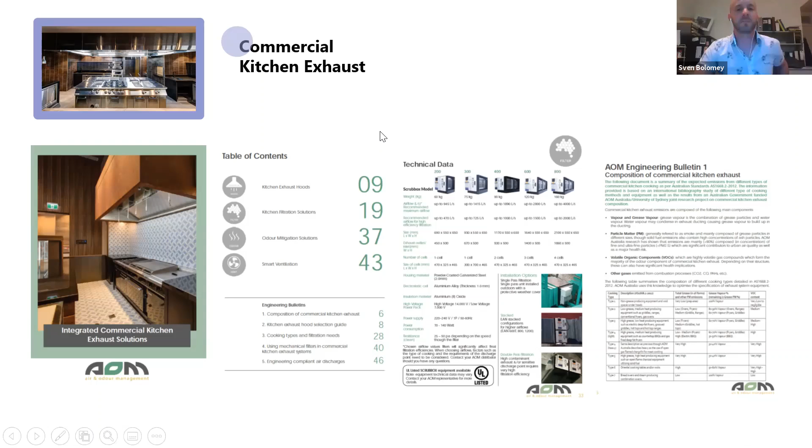So, commercial kitchen exhaust, first slide. During the course of the presentation, I'll be looking at risks, and then how to mitigate those risks through the exhaust system. I'll always come back to this slide to identify the different components of the commercial kitchen exhaust system.

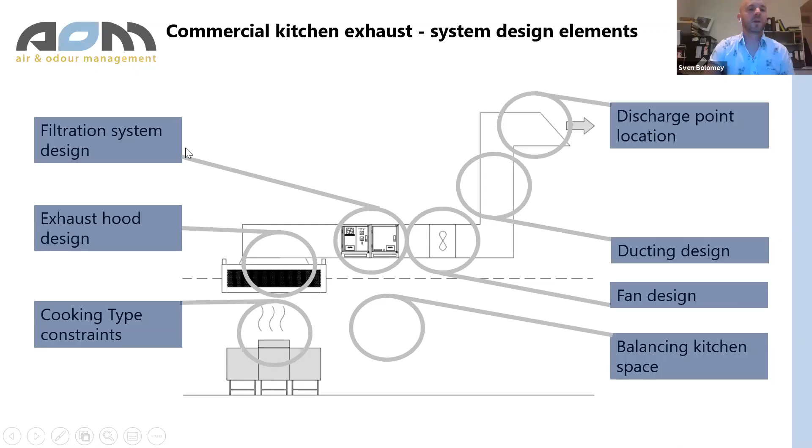So basically, in no particular order, we can look at - and we'll come back to these - cooking type constraints, the type of cooking, the design of an exhaust hood, filtration systems, fan ducting design, the location of discharge points, and the balancing of the kitchen exhaust or the kitchen space, the air balancing. I'll be coming back to this slide and looking at each of these with a focus on the risks.

First couple of slides is commercial kitchen exhaust. So what is commercial kitchen exhaust? We had been working in this space for quite a while, and about 5 years ago we realized we were doing a lot of work with filtration systems and hood design, but we ended up figuring out that not that many people, even internationally, had really looked into what commercial kitchen exhaust was, or studied its composition. So we set up a research project with the University of Sydney.

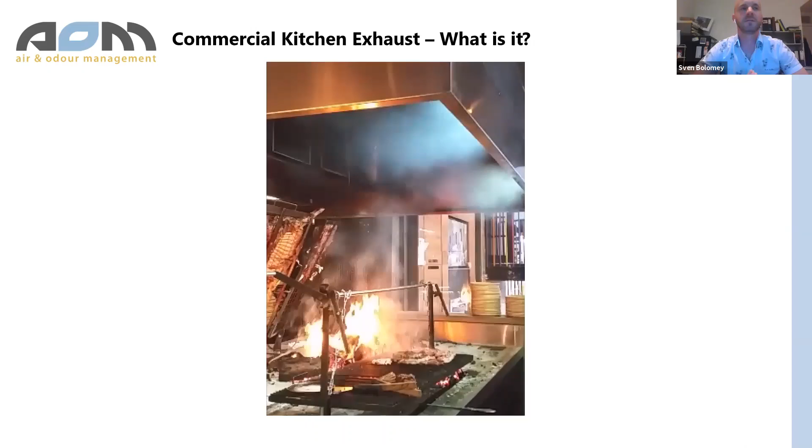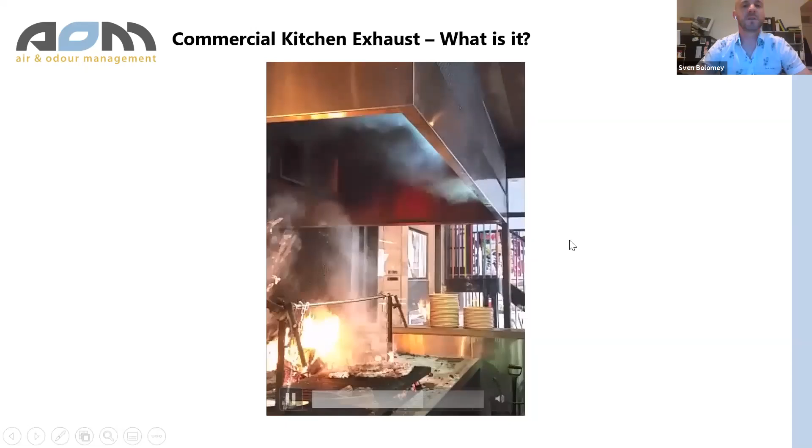This was quite a few years ago now. That research project had the objective of looking at what was actually in commercial kitchen exhaust, and then analysing the different types of filtration equipment generally available on the market to filter out and treat commercial kitchen exhaust, looking at efficiencies and so on. That was the objective of that research project, which we ran for 6 months with the university. It also resulted in quite an in-depth bibliography study from international literature, which we compiled together. A lot of what I say today comes from this research project.

So what is it? Ultimately, what you're seeing here is a pretty extreme example because it's an open fire pit - you don't find those in every second restaurant. It's grilling huge amounts of meat, an Argentinian grill type restaurant. So there's a lot going on under this hood.

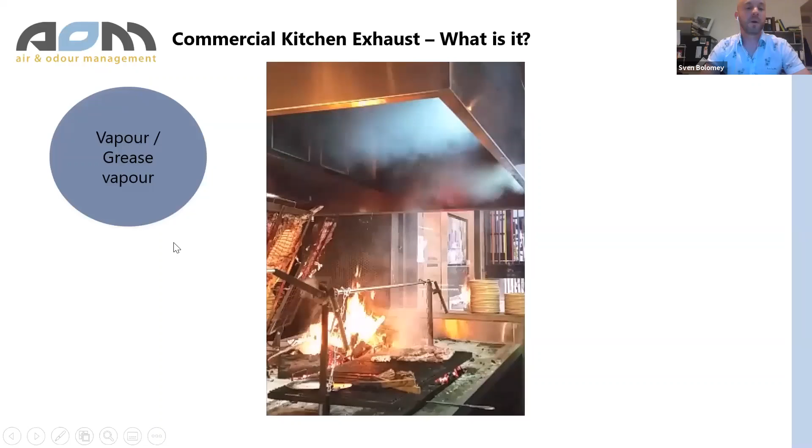In a lot of cases, what you find is the main composition of commercial kitchen exhaust is just a whole load of vapor, because you're heating stuff up - it's water going up into the hood system. But in addition to that vapor, there's a whole lot of grease molecules attaching themselves to the vapor molecules, creating what we've called grease vapor. And the interesting thing about grease vapor is that it has a tendency to condensate when there's a temperature difference, particularly in the ducting. It's generally with this component that you find the buildup of grease in the ducting, because this grease vapor condenses there.

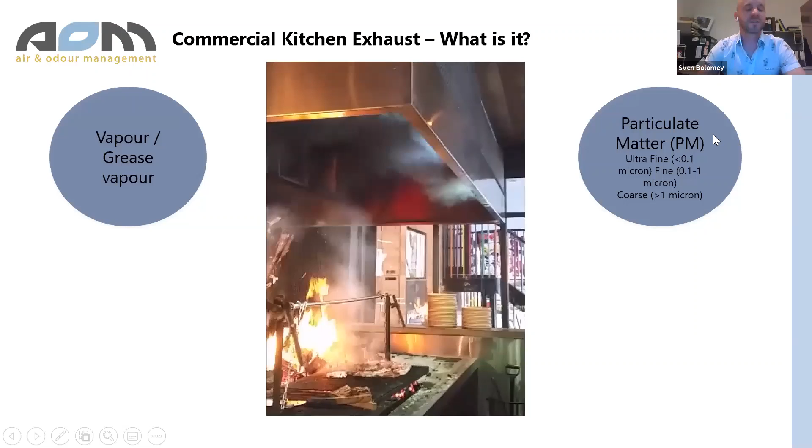The second main component is particles - a huge amount of particles, different forms and sizes. A lot of this particle matter is commonly referred to as smoke, because it's what you can see. In the footage here you have embers coming up, which are large particles, then a whole load of smaller particles because there's a lot of ash also going up. But what we found is that particle matter on a standard cooking line is a whole load of grease in different forms, particularly very fine particle matter - it's just grease forming particles and getting sucked up into the exhaust system.

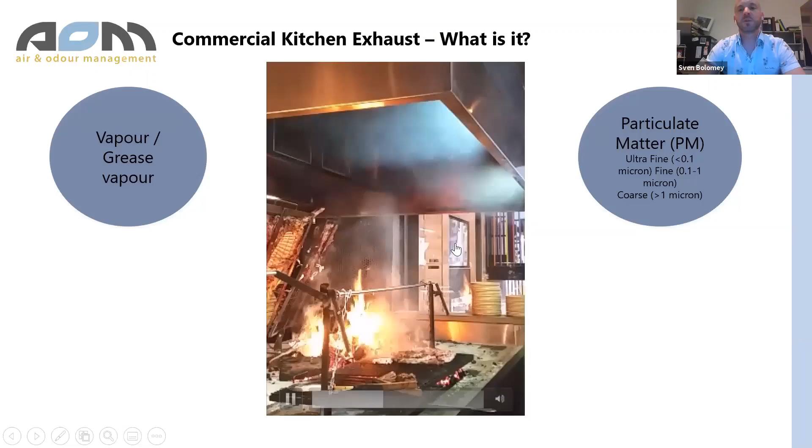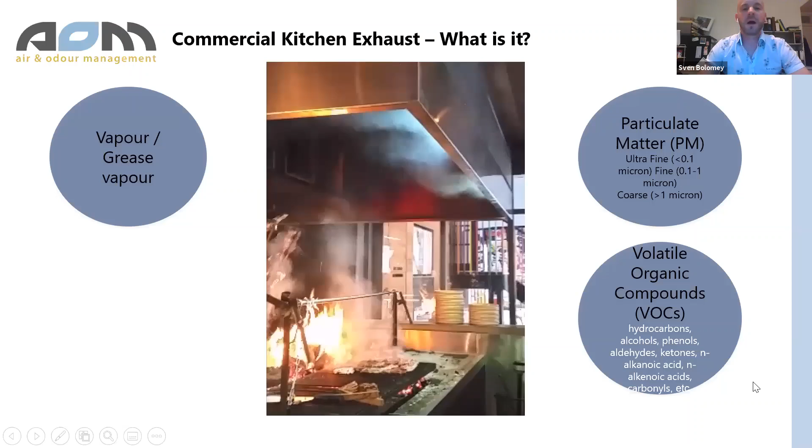Once we've taken out pretty much that solid component, the particles, what's left is a whole load of gases. The main gases, which create the odor component, are composed of volatile organic compounds - a whole bunch of compounds we've been able to identify in kitchen exhaust. Then finally there's a whole bunch of other gases that are really standard gases related to any type of combustion process, so CO2, CO, NO2, and so on.

So when we look at treating commercial kitchen exhaust, we can work on removing grease vapor, we can work on removing particle matter, we can look at acting on or breaking down volatile organic compounds, but we can't do much about these other gases - those are going to have to be discharged at the discharge point.

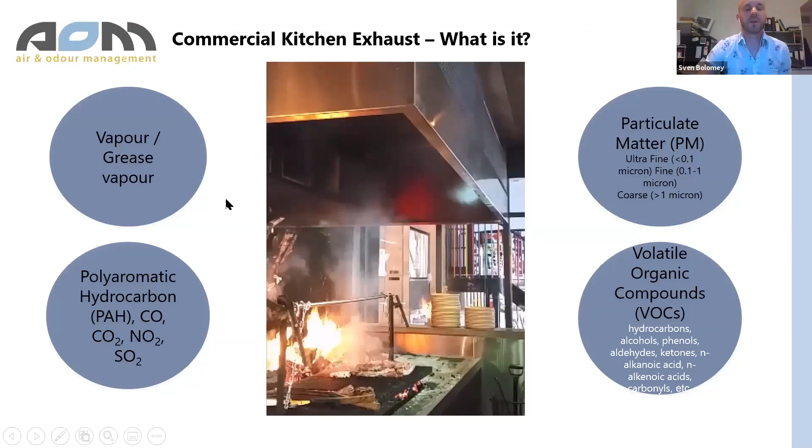So just looking a bit more in detail with regards to particulate matter. During our University of Sydney testing, we got a char grill, an open gas-fired char grill, and we flipped burgers on it. Why we chose that piece of equipment in particular, I'll come back to it later on with a few slides.

It's one of the worst offenders, let's say, in regards to creation of contaminants in kitchen exhaust. So a gas char grill, you'll have the grease of burgers dripping into the open flames and really igniting and creating a whole load of particles and particulate matter. So for us, it was one of the worst offenders, and we knew that prior to doing this research, and this research confirmed it.

What we found in particular is that this type of appliance, like I said previously, produces a lot of small or fine particles. So it's really small stuff that's getting sucked up into the ducting, and it's not the type of stuff that gets then easily deposited into the ducting or drops into the ducting.

This is the type of stuff that you see as smoke that comes out of a stack. So that's one particular first thing that we found, is there's a very high concentration of the fine particles as opposed to these larger coarse particles, which are generally stopped by a standard grease filter, a baffle or stainless or honeycomb filter within an exhaust hood. But this stuff just goes straight through.

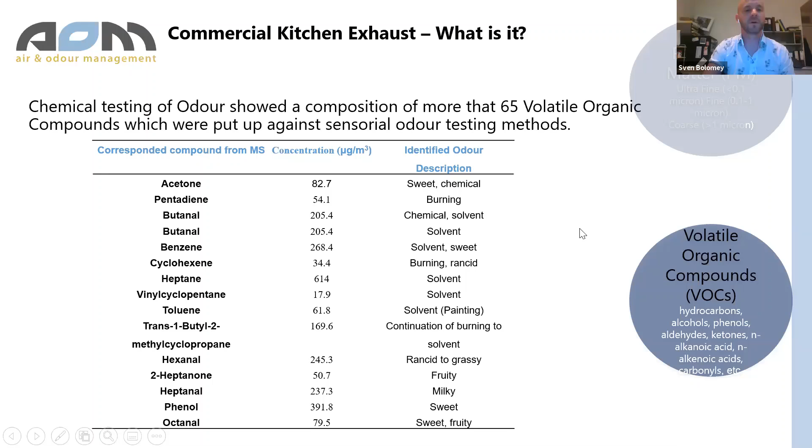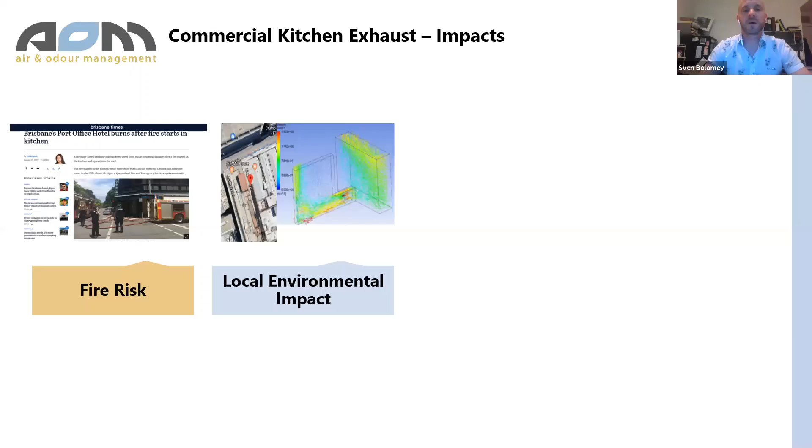With that in mind, I'll be looking in particular at four different impacts generally related to commercial kitchen exhaust systems, things that often come up in projects we work on. The first is the fire risk of exhaust systems. The second is what I've called a local environmental impact, the impact to local neighbors or who live near a discharge point, users, offices, and so on. Then there's an indoor air quality health impact related to all those contaminants in a kitchen exhaust. And then I'll briefly touch on a general urban environmental impact on a larger scale.

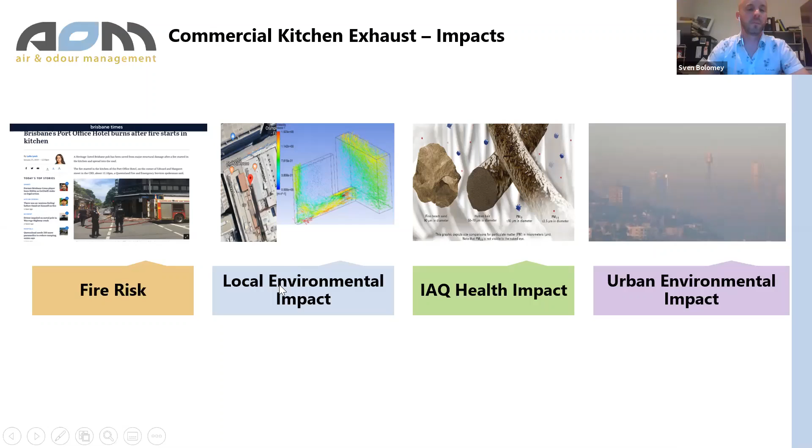So moving higher up from this local environmental impact, looking at these different impacts one by one. The first one, the fire risk—very common. What we've found is it's common in small shops that are not necessarily abiding to standards, but it's also in heritage buildings with large, very respectful, let's say, kitchens.

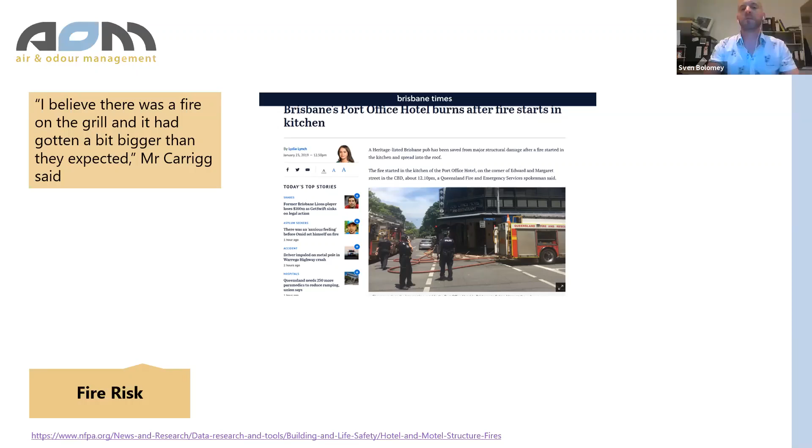Typically, the example that I've put up here is the Brisbane Port Office Hotel, a couple of years ago. That fire was contained within the ducting, luckily, and didn't move out of the ducting into the whole building. The interesting part about this example is that the fire started on a char grill. So it's not necessarily a solid fuel appliance with an open fire pit like we saw in the video previously, but here it was really just on a standard gas-fired char grill with a flame that moved up and ignited fuel in the ducting.

The US National Fire Protection Association have stated and do state that one of the leading origins of structural fires in hotels and motels is coming from the kitchens. So just to underline that it is a hot topic, pardon the pun.

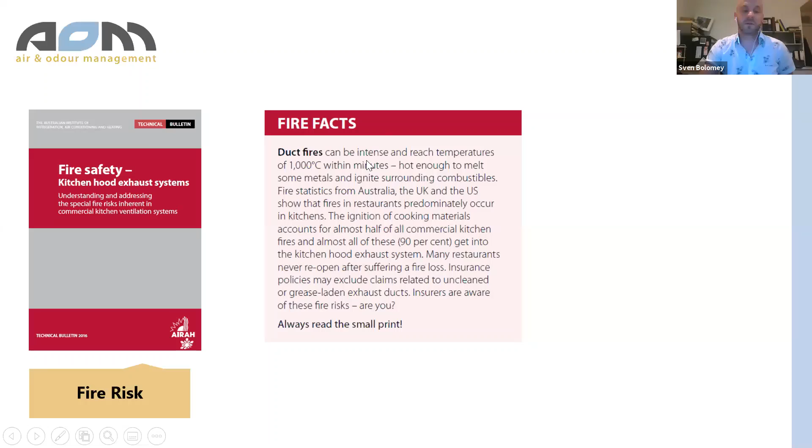The key document with regards to this, and I won't be repeating everything from this document because it's quite comprehensive, is the AIRAH Bulletin on Fire Safety of Kitchen Exhaust Hood Systems. So that's a good piece of reading if you want to delve into that. One thing that the document does repeat as well is that it's a serious thematic, and it does give a brief overview as to why kitchen exhaust systems are such a high fire risk.

Very simply put, it's this fire triangle, which is very standard, but basically you have cooking. So you have the ignition, you have the flame that's able to ignite the fire. You have the buildup of fuel in the ducting, or in some cases within the appliances, such as fryers, which have oil just sitting there at high temperatures.

So there's fuel, there's ignition, and because it's an exhaust system or a ventilation system, you have a whole load of oxygen. So all these three elements to the fire triangle are perfectly represented within a kitchen exhaust system, and that's why there's such a high risk.

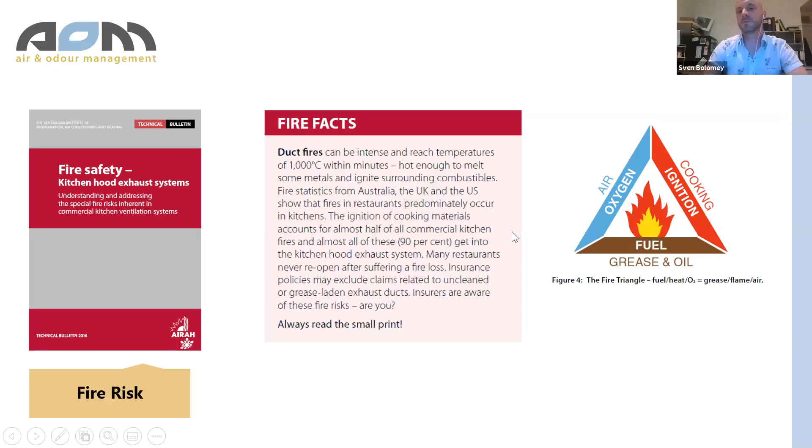So coming back to this slide and looking at the different elements as to what we can do to minimize this risk with these different design elements, there's three in particular that I'll look at. The first thing is identifying the cooking type and the constraints that the cooking type might result in. As a barrier between the ignition from the cooking equipment and the buildup of fuel in the ducting, you have the exhaust hood. So it's clear that the exhaust hood, which acts as that barrier, has an important role to play, and then general ducting design as well, because that influences the capacity of the system to build up fuel.

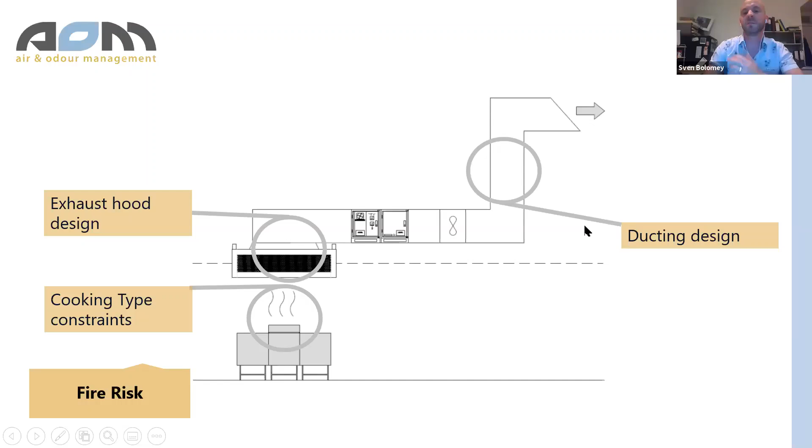So looking at cooking type constraints, research identifies three primary types of equipment that are likely to cause restaurant fires. The first is the deep fat fryer, again, because it has that huge amount of oil just sitting there at a high temperature, and it's very much flammable cooking oil. And as I said in the first slide, it's also the appliance that generates grease vapor, and that grease vapor builds up in the ducting. So you have that source of ignition and the buildup of fuel in the ducting through this appliance.

Then really anything to do with gas, because you have that open flame - be it a char grill or even gas cooking ranges, which causes flare up. And also generally these appliances are used with very fatty type foods, examples of steaks and burgers, and fatty type foods means more buildup of fuel in the ducting.

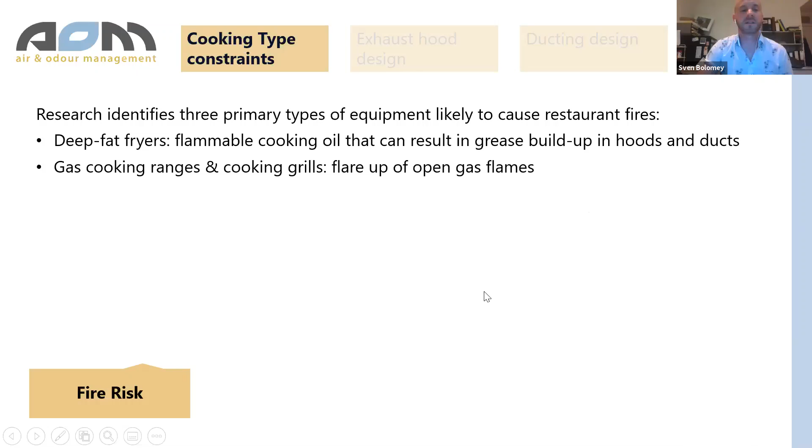And then you have, of course - and this is a lot of cases that come up with restaurant fires - that come from solid fuel. And the more there's solid fuel in restaurants, the more the risk of this fire comes up.

So AS 1668.2 has a clear statement with regards to solid fuel and the constraints around solid fuel. That statement is that any charcoal and solid fuel appliances should or need to have a completely separate exhaust system, so there's no mixing of solid fuel and non-solid fuel appliances within the one exhaust system, as per that standard. The reason is: solid fuel has a higher risk of ignition, and the non-solid fuel appliances, which are generally deep fat fryers and the likes, will build up fuel. Solid fuel generally runs at such a high temperature that it burns off a lot of fuel, whilst the non-solid fuel appliances build up the fuel in the ducting. So when you blend the two together, you get a higher risk of fire. That's why the Australian standard, that section, pretty much says two separate systems.

So one thing that I have come upon recently when dealing with this is the scope of this standard. One of the first statements right at the beginning says this standard is applied to new designs and new builds. So you have a lot of situations where, of course, it's retrofitting new restaurants into old designs and old builds, where it's impossible to have two different exhaust systems because it hasn't been designed that way. So that's when this clause can be bypassed, using systems to minimize the risk of fire.

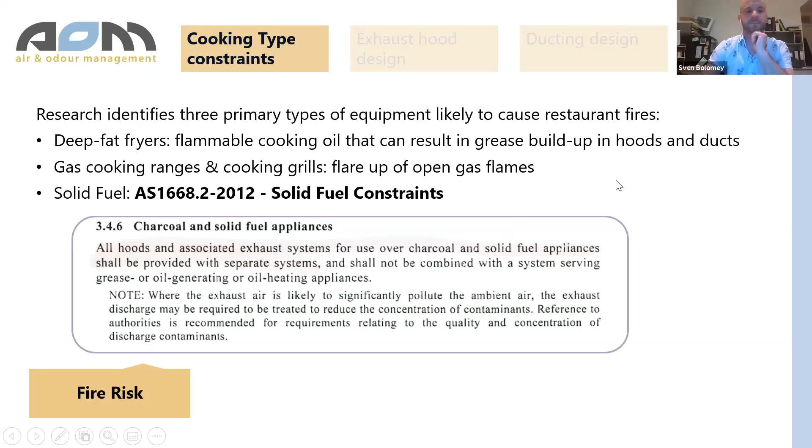So as I said previously, exhaust hood design comes down to AS 1668.1 2015, where we're looking at the exhaust hood as the barrier between a potential ignition and the build-up of fuel in the hood. Australian AS 1668.1 states, and the key statement is here with regards to flame and spark arrestance: when you have an exhaust duct in a building with more than 10 meters of length and an exposed flame or embers - embers is clearly when you're using solid fuel, exposed flame would refer to gas type appliances as well as solid fuel.

Here the statement says that devices that prevent the spread of flames in accordance with UL 1046 are incorporated into the exhaust hood or filtration systems. So UL 1046 - looking through it, there's a couple of elements. One, it wants any grease filter within the exhaust hood to act as a flame barrier, meaning effectively stopping a flame from moving up through the hood into the plenum, into the ducting. So testing has shown that baffle filters in that regard respect that flame barrier. Honeycomb filters - I have not seen a honeycomb filter that has successfully passed that test.

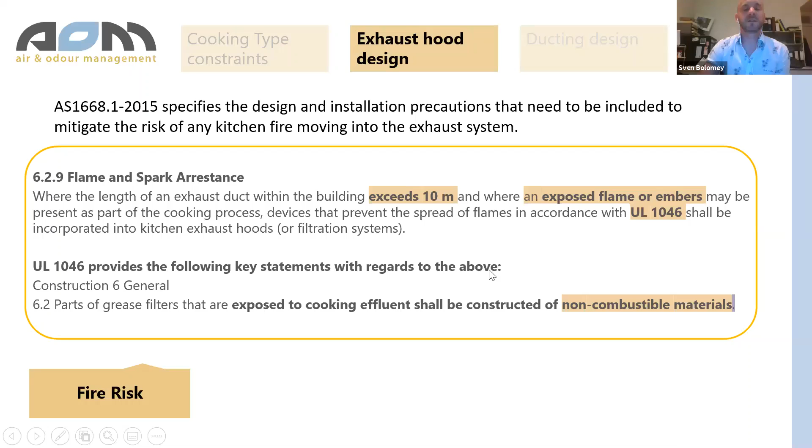So looking at the exhaust hood, not only as a barrier between flames moving up through the ducting, but also the first or best means of filtering out grease particles prior to them moving into the ducting and accumulating. This is when we did our research with the University of Sydney and tested different forms of filters or filtration equipment that we could effectively position into an exhaust hood.

So what we have here is HCF, a honeycomb filter, so just a standard grease filter located in the exhaust hood; a grease filter with UV built into the hood; a grease filter with electrostatic precipitators located in the hood; double pass electrostatic, so that's two electrostatic precipitators one after each other, also located in the hood; and AC, which is activated carbon.

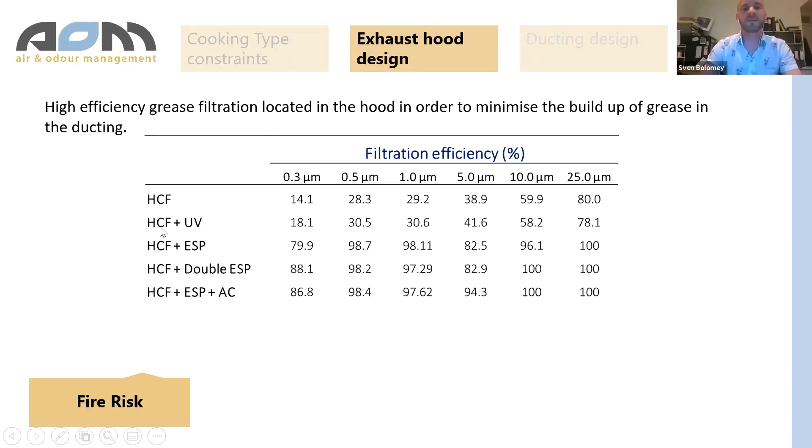So we tested the different efficiencies of these filtration methods, and to no surprise to ourselves, because we'd been using this method the most previously, the double pass electrostatic precipitator was able to achieve the highest efficiencies of particle filtration, removing grease particles within an exhaust hood, with efficiencies into the high 90% of filtration.

Again, this is with flipping burgers over a char grill, producing a lot of contaminants. In these situations, a UV treatment really didn't have a significant effect on the amount of particles that were getting through the exhaust hood.

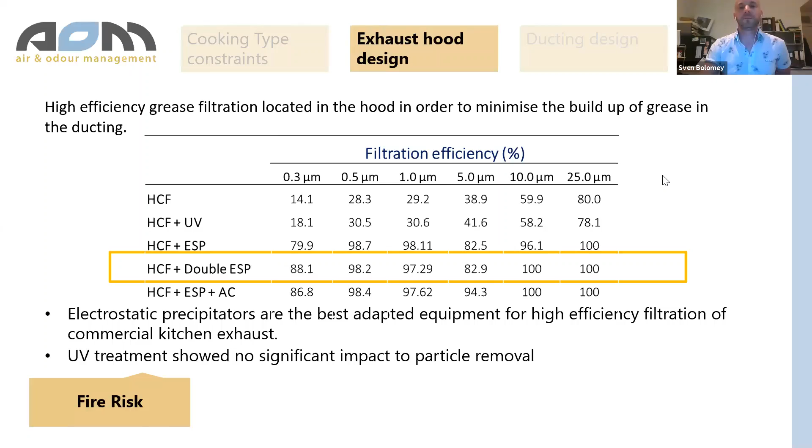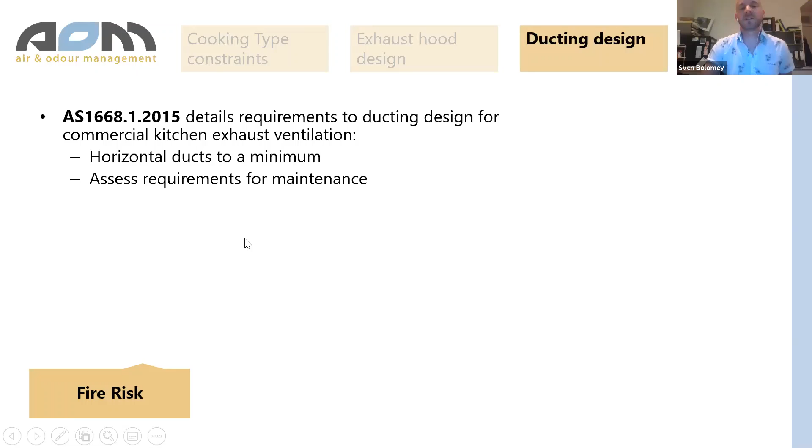Moving on to ducting design, this refers back to AS 1668 and how to minimize or design ducts, or a whole project, so that you minimize the risk of buildup of grease. So the key statements are: horizontal ducts to a minimum, and assess requirements, of course, for maintenance. That's really just summarizing very briefly that standard.

Another interesting piece of bibliography, it's an older document now, dates back from 2002, but it looks into the different ways that particles or grease build up in ducting. It looks at three different grease deposition methods in ducting: gravitational, with particles dropping down due to gravity and building up in the bottom of the duct.

You have turbulent deposition, caused by turbulence with the air in the ducting, with particles being smashed on the sides of the ducts in particular, and then building up within the ducting. And then there's that temperature differential I discussed previously, where you have condensation of grease vapor in particular.

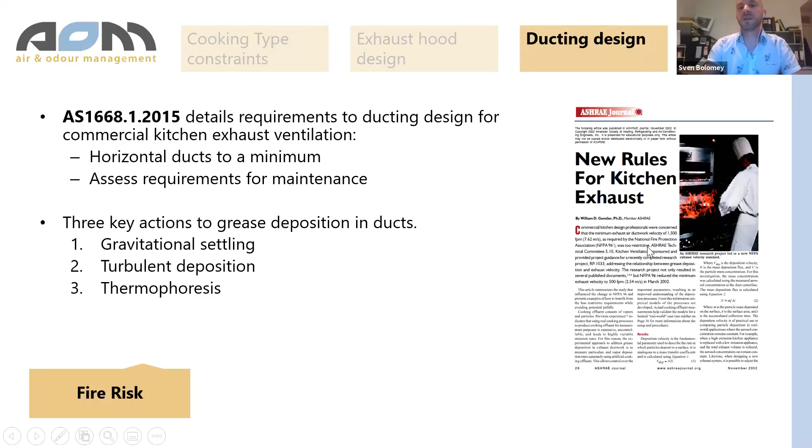So this document looked at these three different methods and in particular looked at velocity through ducting. In Australia, we generally design horizontal ducts to a velocity of about 10 meters per second, a little bit under perhaps. This document looked at what happens if we start varying the velocity and bringing it down - does that significantly increase the amount of particles or grease building up in the ducting? Basically, the answer, in summary, is no.

The results were that in the majority of cases, you could bring the velocity down to roughly 2.5 meters per second and still have the same type of buildup as you would have at 10 meters per second.

The reason being that when the air goes fast, you have less gravitational settling but more turbulence. When it goes slow, you have more gravity, less turbulence. Fast, you have a lot of turbulence, and those kinds of balance out.

That's the majority of cases, because then condensation - if the air is slow and you have big temperature differentials, with ducts going outside in Canada or wherever, then you do have a lot more condensation issues. But in the majority of cases, velocity was not necessarily a reason for increased grease buildup in ducting.

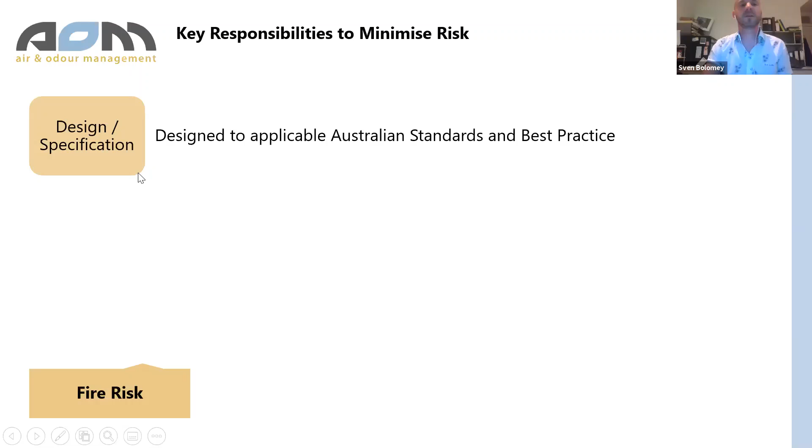The overall system needs to be supplied and installed as per that design. But ultimately, and we see this with fires in buildings, it comes down to the end user and the capacity that the end user has to maintain the exhaust system.

And that's one thing, because I'm in a working group within AIRAH, they've set up a working group with a particular focus on fire risks of exhaust systems and how to ensure through maintenance and proper design, allowing for proper maintenance, that we're able to minimize that fire risk.

This technical group is looking to establish a best practice guide to underline industry best practice as to how to maintain these systems to decrease the risk. But the key element is that it's really the capacity to maintain these systems that's important.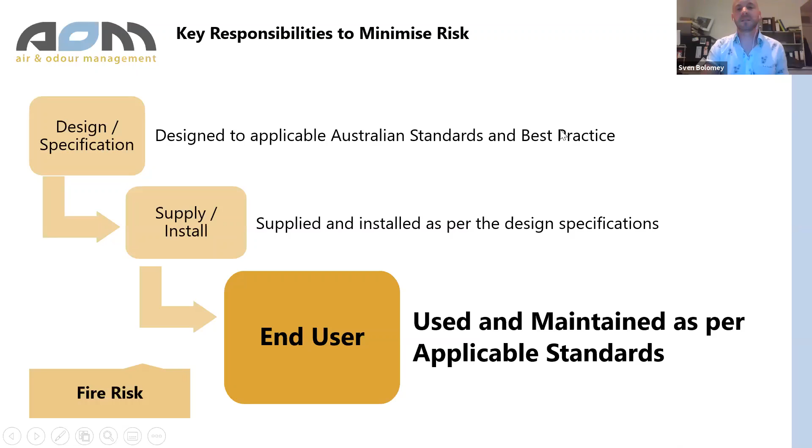So moving on, just a quick example here: the W Hotel up in Brisbane. It was part of a new development at 300 George Street. For the hotel, the overall mechanical design of the exhaust systems was to minimize the buildup of fuel in the ducting.

Some of the restaurants were at lower levels, some were at higher levels, and they just wanted to capture the grease, as much of it as possible, as close as possible to the source, which is the kitchen equipment.

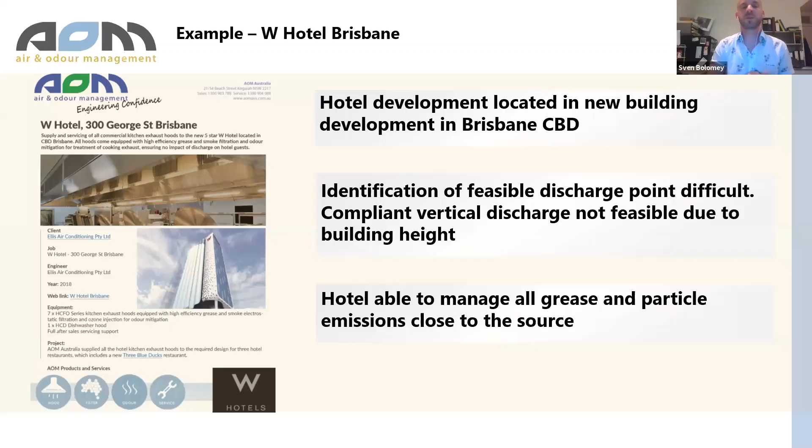So in this case, the exhaust hoods we supplied were the ones detailed previously, with inbuilt electrostatic precipitators able to remove up to 90 to 95% of the grease within the exhaust hood. With proper maintenance of those systems, we're continuously removing the grease out of the exhaust hoods, stopping the buildup of grease in the ducting.

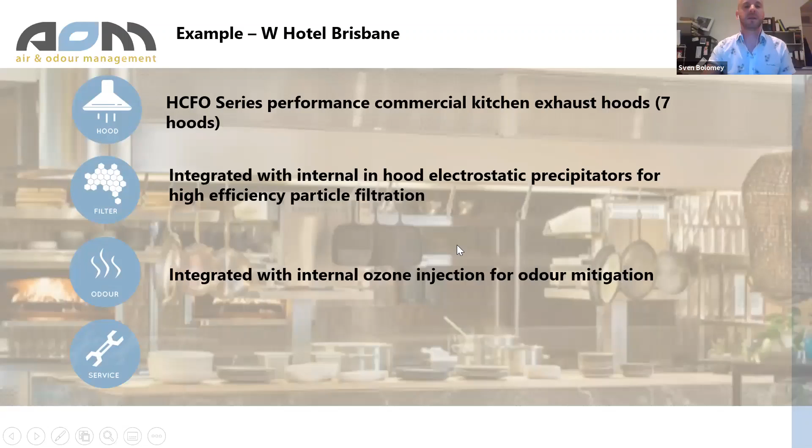So there's also a requirement for servicing, of course, of these exhaust hoods.

So this discharge point was really an example of a very high environmental, or high local impact, discharge point.

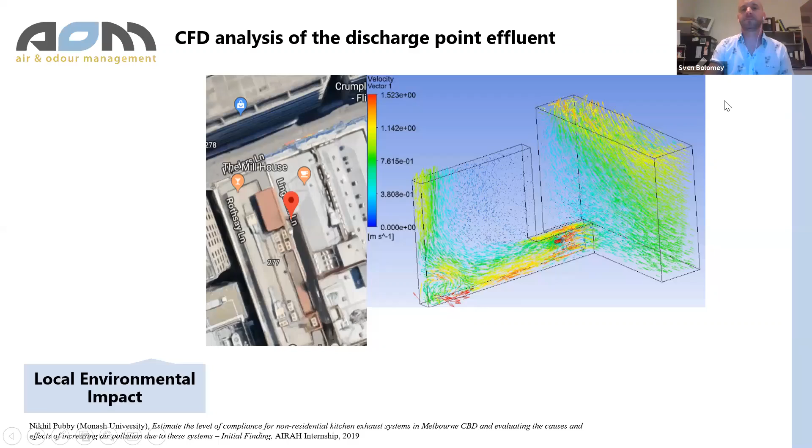AS 1668.2 pretty much defines the requirement for the discharge of commercial kitchen exhaust. It runs throughout the standard, so I've taken out some of the key elements here that we'll discuss in more detail.

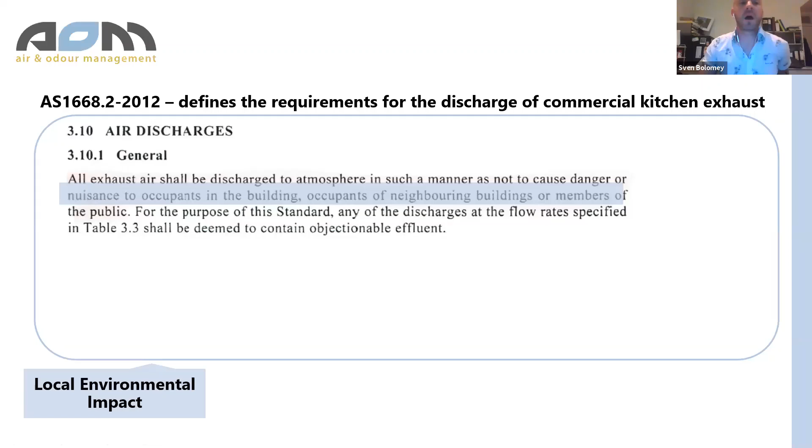The first is the chapter related to air discharges, stating that exhaust air should be discharged to the atmosphere in a manner as not to cause danger or nuisance to occupants of the building, neighbouring buildings, or members of the public. One of the key words here is 'nuisance,' and it comes up quite often within the standards.

A bit further on, in the chapter related to concessions, about whether or not you can discharge horizontally, another key word that comes up often is 'odour.' Odour is pretty much the parameter that exhaust systems are judged upon, the capacity of whether or not they're producing odour.

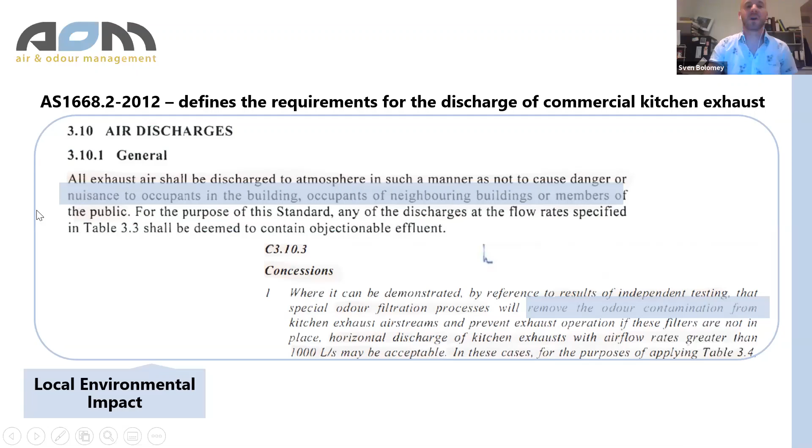So what is the nuisance? A general definition: environmental nuisance is defined as an unreasonable interference with an environmental value caused by emissions of aerosol, fumes, light, noise, odour, particles, or smoke.

So in kitchen exhaust systems, we have a lot of these. I won't talk about noise of the fan - that happens occasionally. Light, probably not, but aerosols, fumes, odor, particles, dust, smoke, it's all there.

With a particular focus, kitchen exhaust systems, or Australian standards, look in detail with regards to odor. One reason, in my opinion, is that if you can prove you remove the odor of your exhaust system, you're pretty much proving you remove all the other elements as well - aerosols, fumes, particles, smoke - simply because you won't be able to act upon the odor component if you've not taken out that particle or visible component. So by taking out the odor, you prove that you're dealing with all the rest.

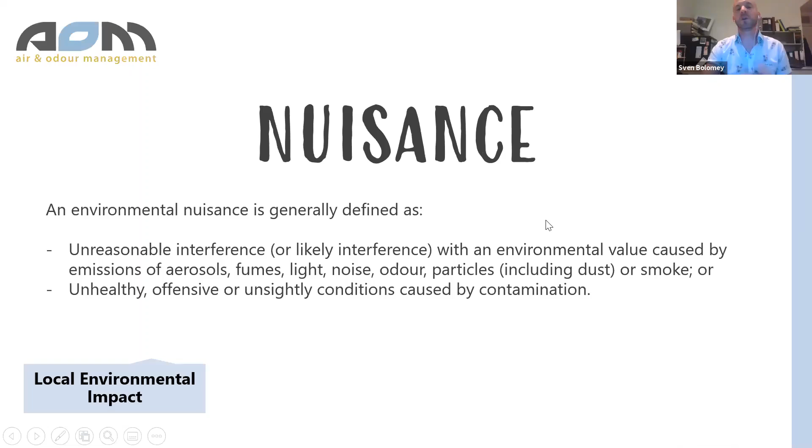I think Australian standards also focus on odor because it's one of the main causes for complaints related to restaurants. People will generally say, well, I'm smelling this smell all the time. And that's something that comes out with this document here. Food and beverage tenancies and their impacts are regulated by local councils, and local councils have this document, the Air Quality Guidance Note, which they use to evaluate whether or not a restaurant is causing a nuisance.

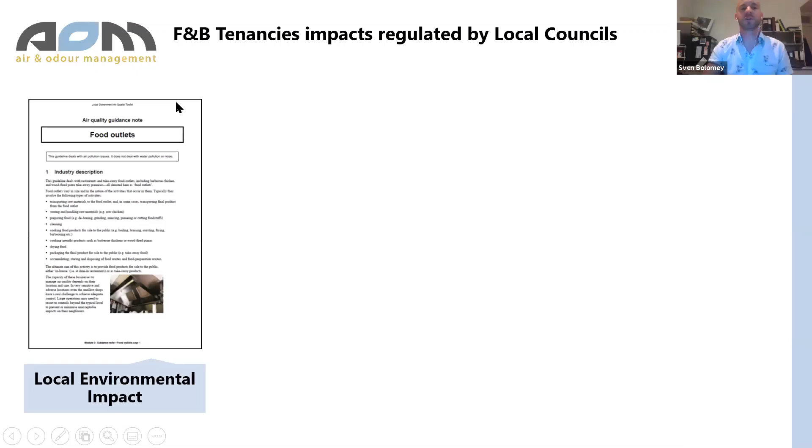Without going into detail, because it's quite a meaty document, in three statements: complaints from food outlets usually arise because of frequency and duration rather than intensity. So that means if you're walking down the street and you get an intense smell of bacon, you're probably not going to run to your local council and complain. You're probably going to go buy a bacon and egg roll or similar, whatever your liking is.

If you have an open window and you live above a restaurant that every day between 10 and 12 o'clock you're smelling bacon, so you have frequency and duration there, you'll probably go and complain to council because you can't stand the smell of bacon anymore.

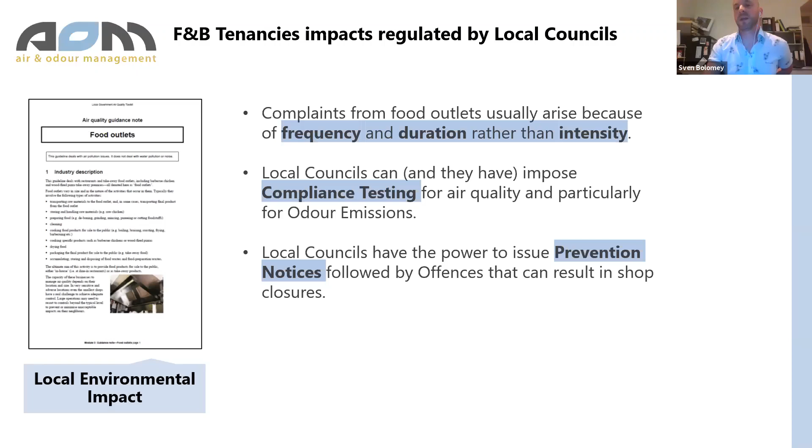So then what local councils can do, and we have seen it, is they can impose compliance testing. And compliance testing, from what we've seen, is generally always focused on odor. They're not going to go look at whether or not there's smoke - they're going to look at whether or not there's odor emissions at a discharge point. Ultimately, local councils have the power to issue prevention notices should they deem that a restaurant is causing an offence. And we have seen it escalate to shops closing down because they could not abide by the council notices.

How are odor emissions judged? This is New South Wales - I'm assuming every state has pretty much the same regulations with regards to odor emissions. This is an even meatier document, which I won't look into too much detail, but it does underline the steps to implementing a compliance review related to odor emissions, stationary source, or a discharge point from a restaurant.

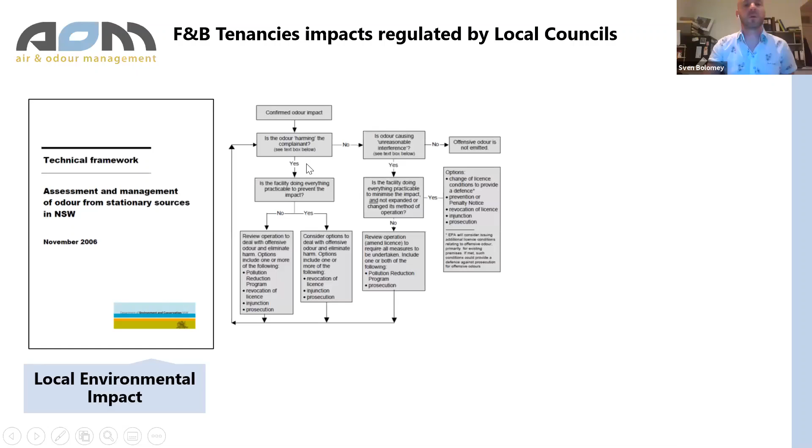One of the key matrices with regards to restaurants is this one, and one of the key statements I've taken out of it is this: is the facility doing everything practicable to minimize the impact and not expand or change its method of operation? So the idea of everything practicable to minimize the impact - that's an important statement because it pretty much says, well, is the restaurant running fully compliant with a filtration system that's properly maintained?

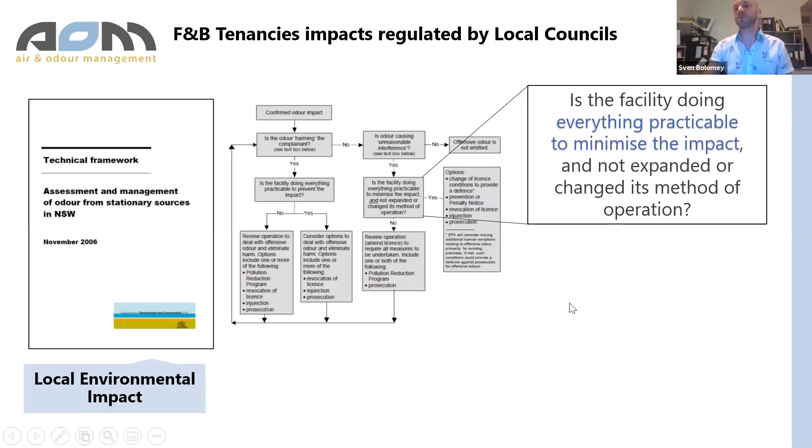And if it is, then it's pretty much putting that restaurant or that building on the right side of compliance. And restaurants, when councils may tend to say, well, yes, the restaurant's doing everything possible and it has been designed that way and it's operating that way - so really, should a complaint arise, a council might favour the restaurant in that case. And I'll come back to one of the main reasons for that.

I'll look at this example, which is an example of council really looking into, with a fine comb, one particular tenancy. This is the Bondi Pacific development, Bondi Beach in Sydney. It used to be a hotel, and the new building - the people who bought the building, developers - decided they'd redevelop to luxury apartments and food and beverage tenancies down below, which ultimately were a whole load of food and beverage tenancies.

But because the original design was a hotel development, they didn't have room, and they didn't have the ventilation system or exhaust system to transform each of these spaces into a common exhaust system going up onto the roof. So basically, each of the tenancies on the ground, second and first floor needed to be evaluated independently and discharged independently at different points through the building. Ultimately, these are horizontal discharges, and they need to be designed so that they comply to standards.

One of the toughest ones was the Bondi Pacific Club, which had a fully solid fuel open fire cooking line. The local council, as part of the DA application, said that prior to giving final approval for the shop to open, they wanted an independent odour assessment report carried out with conclusions from an independent expert.

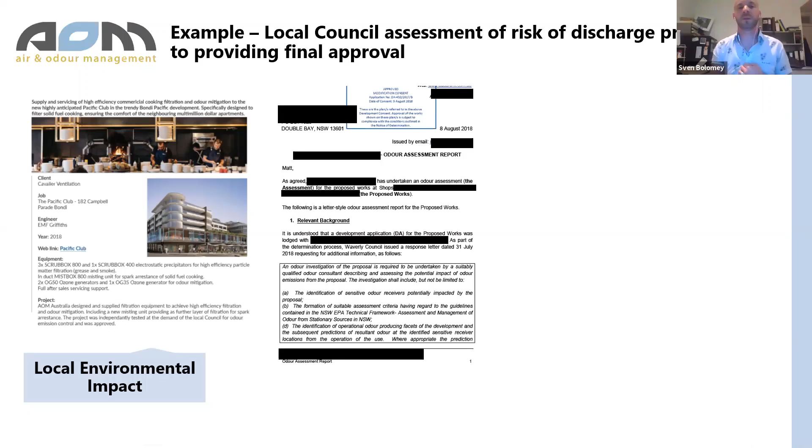So this was done once the whole restaurant had been fitted out. We supplied all the filtration equipment to achieve compliance. The day before opening, the independent odour consultant came down and did the test for compliance. It was a pretty stressful time for us, but what it came up with was odour emissions of 5,000 odour units with no filtration, and roughly 600 odour units with filtration.

The Australian standard used to determine that is the Australian Standard for Odour Assessments, Determination of Odour Concentration by Dynamic Olfactometry. It's a sensorial test, a sniff test with a panel of experts who receive a sample of contaminated air and judge the odour composition or concentration within that air.

Of course, a non-filtered sample smelled of smoky cooked meat, which is logical because it was an open fire pit cooking meat, while a treated sample smelt of a musty ozone smell. It had been treated using ozone, so that type of smell came out afterwards.

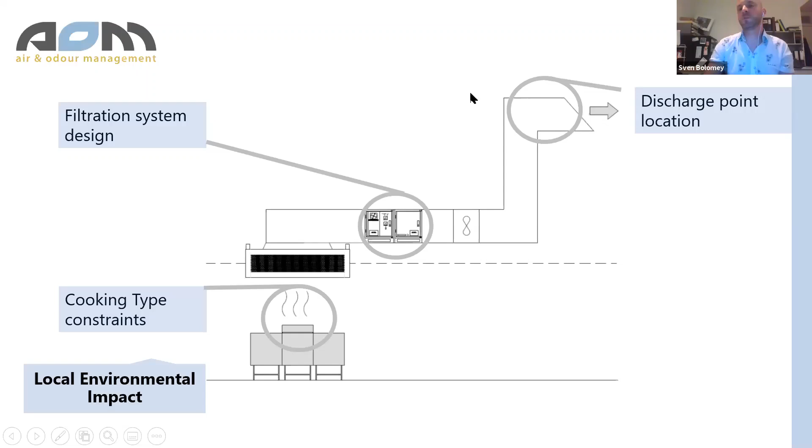So cooking type constraints - there's a big variance between different types of cooking. In particular, the use of the char grill, which was the red flag for us when we've got a char grill or solid fuel within our cooking equipment. But it comes down also to the type of equipment, the cooking method, temperatures, type of food, fat content of the food. So there's a lot of different parameters that might influence the amount of particles and emissions from a cooking line.

But again, solid fuel and char grills are huge contributors to emissions. A burger cooked over a char grill with an open gas-fired flame will produce 10 times more emissions than if you put that same burger over just a griddle. It makes for a whole lot better burger, in my opinion, but it just makes for that much more emissions.

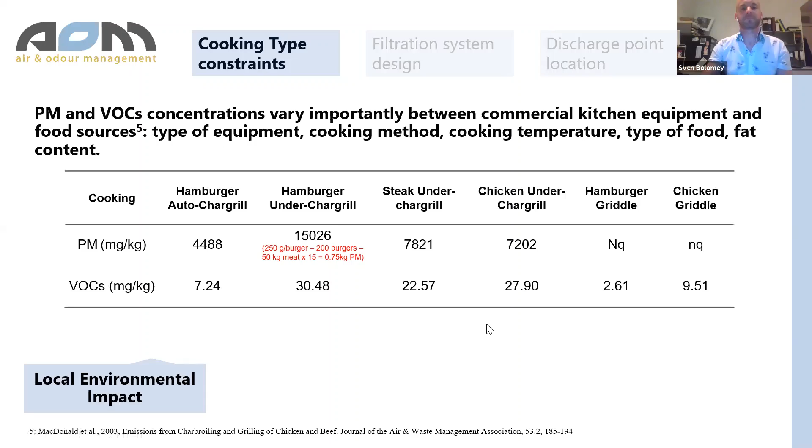So when we're designing filtration systems, it often helps to look at the type of cooking that's going to be associated with that filtration system. Ultimately, a well-designed filtration system can decrease the frequency, duration, and intensity of emissions, and remove that risk of causing nuisance, as discussed previously.

Filtration systems will, as I said previously, first remove the particles. Once we've been able to remove the particles, we've removed that visible smoke, and that lets us hit the second stage, which is acting on the odour. But first, remove the particles.

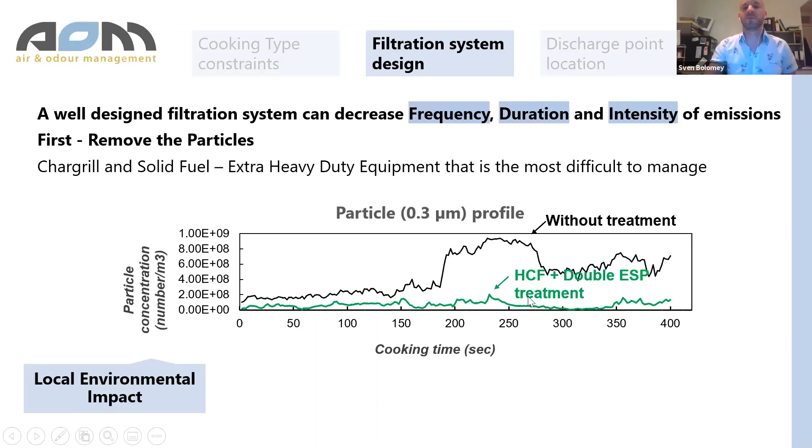And then once we've removed the particles, then we can act on the odor. So second is mitigate the odor. There are two key tools that we have that are generally used in industry to be able to remove odor from kitchen exhaust systems. One is the use of ozone, and two is the use of activated carbon.

From what we found with the research at Sydney Uni, looking at the chemical composition of exhaust systems, both ozone and activated carbon were able to remove roughly 90% of all VOCs in that burger flipping exercise. So we're able to achieve high removal efficiencies.

And that corresponds well with what we were able to achieve in situ. So the example that I showed previously at the Pacific Club, where we were able to remove roughly 80% of that smoky cooked food smell. So these are the type of efficiencies that we're able to achieve with odor, roughly 80 to 90%.

And what I didn't say previously with the example at the Pacific Club was because there are no clear values in Australian standards, you must achieve this and then you pass the test for odor emissions. It comes down to the independent consultant who says yes, this is in line with best practice and we recommend opening the shop. And that's ultimately what happened at the Pacific Club. So it was a good news story in the end, is that the independent consultant said yes, that's in line. And looking at where the discharge point is located, we recommend this shop to be open. So it comes down to that.

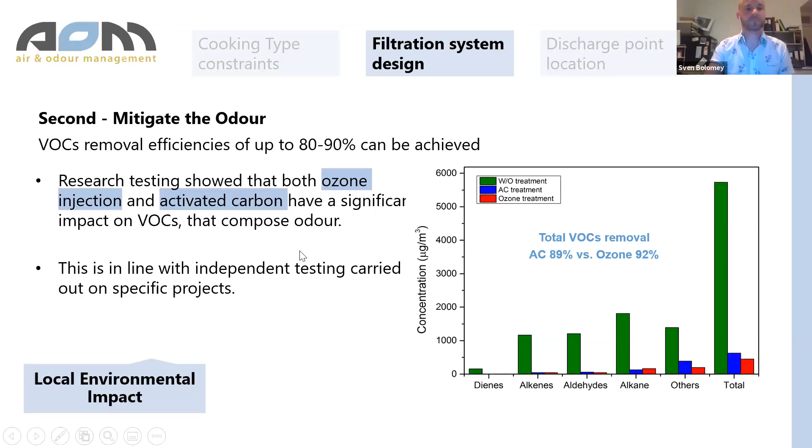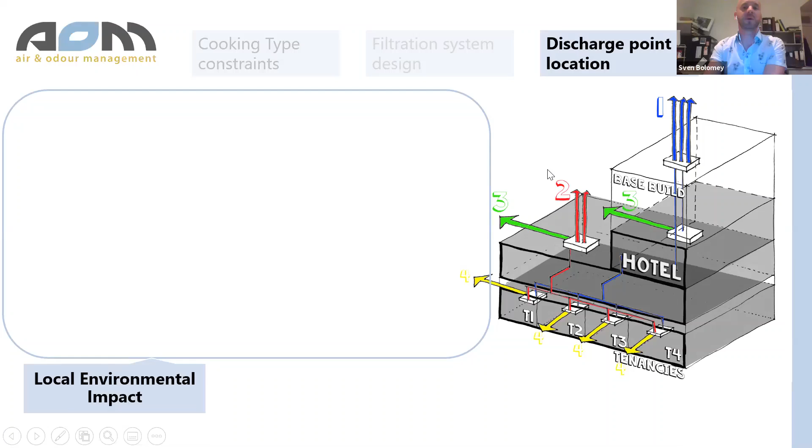So if the airflow is under 1,000 litres per second, the emission or the discharge is not deemed objectionable, and ultimately there's no constraints other than not making a nuisance. So you can discharge air under 1,000 litres per second wherever you possibly can, but you can't create a nuisance, and you still have to respect minimum separation distances from intakes, boundaries, and so on.

And then when you have airflows of over 1,000 litres per second, these are deemed objectionable, and there are more constraints to discharge it. These discharges should be vertical, 5 metres per second discharge vertically, though Australian standards do allow for concessions for over 1,000 litres per second, where you have to prove that you are able to remove the odour through independent testing, and that these systems will be maintained.

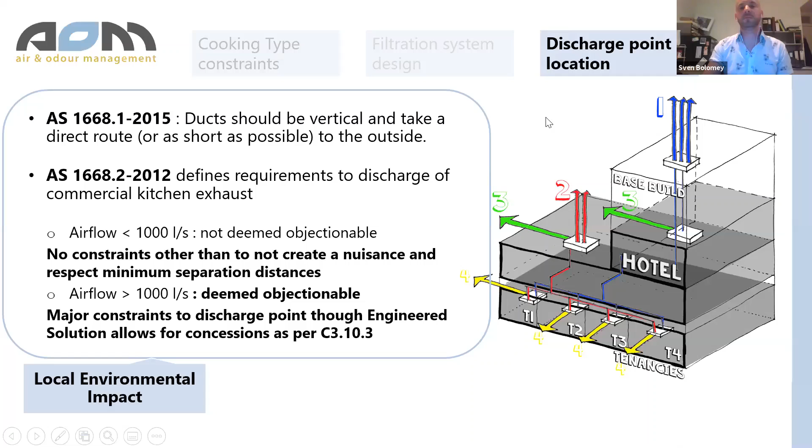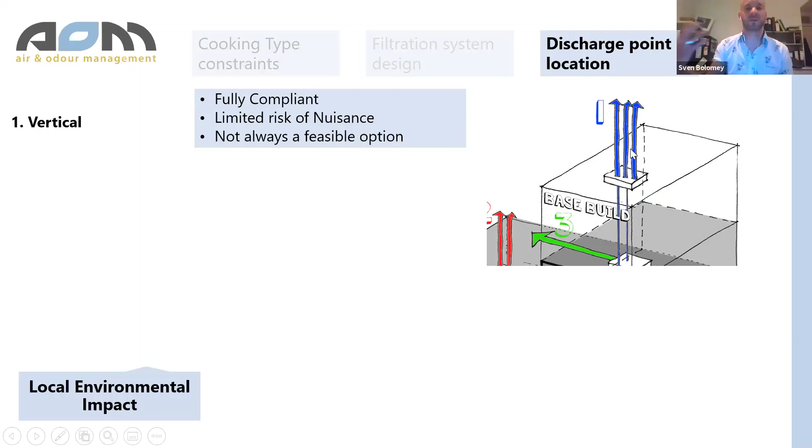So just look at each discharge point very quickly individually. The ones that we come up on often find vertical discharge at the top of the building, fully compliant. There's a limited risk of nuisance, but it's not always a feasible option, particularly with very high rise buildings.

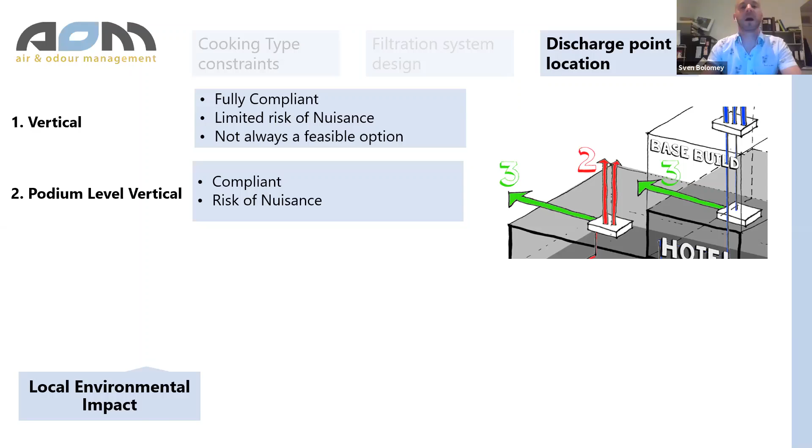So often what we find is this podium level discharge, which respects AS 1668.1 as well, in that the duct lengths are lower, so you stop at a podium level. It's also compliant because it discharges vertically. Though depending on how the podium is used and the surrounding area of the podium, there is a risk of nuisance. So we've been exposed to some projects with a vertical discharge at a podium level, but because of apartments and open spaces, there has been the requirement for filtration there.

Then we often find, and the W Hotel in Brisbane was one of these cases, a high level horizontal discharge. So we find that these discharges have a limited risk of nuisance because they're located higher up from a street level discharge, but they are non-compliant. And in respect to that, Australian standards, you need to tick the boxes and say, well, I've got filtration equipment to be able to discharge horizontally.

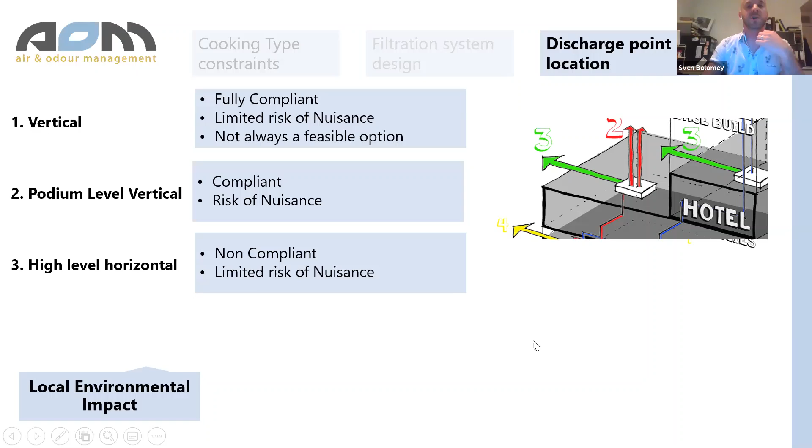And then finally, there's the low level horizontal discharge, which is non-compliant. Of course, because you're at a street level or at a lower level, there's a high risk of nuisance. Though because there's less ducting, there's less overall design through the buildings, they're quite easy to implement, particularly if it's just a small sandwich press that you have to exhaust, or small fryer and so on. Very easy just to have a horizontal discharge and be able to prove that you filter out and remove odor. Of course, when you're dealing with char grills, solid fuel, it becomes a lot more difficult to implement.

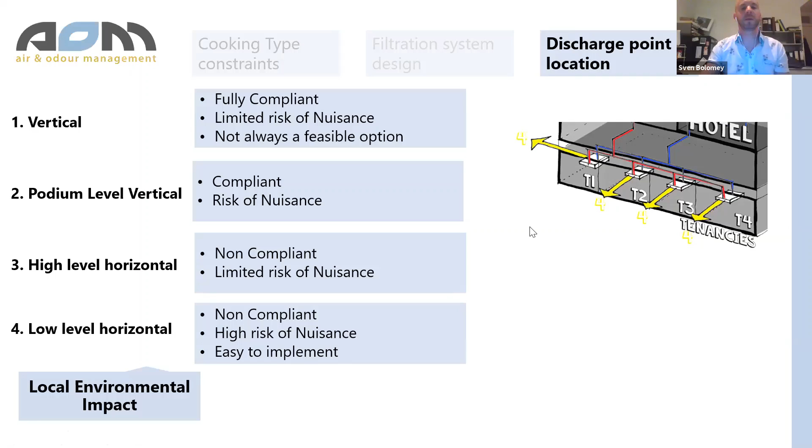So the key responsibility to minimizing risk is design. As I said previously, if a restaurant can prove that it has been designed and is operating so that it aims to minimize risk, then councils, if there is potential nuisance, will act in favor of the restaurant. You might have a restaurant discharging kitchen exhaust with 10 open windows. Because odor is a sensorial element, you might have one person complaining to council. Council looks at what's going on in the restaurant, finds it's perfectly compliant with filtration equipment and whatnot, and that it's been maintained. Council would generally say in that case, look, I'm sorry, one person complaining isn't enough, you can continue operating simply because you've met all the requirements.

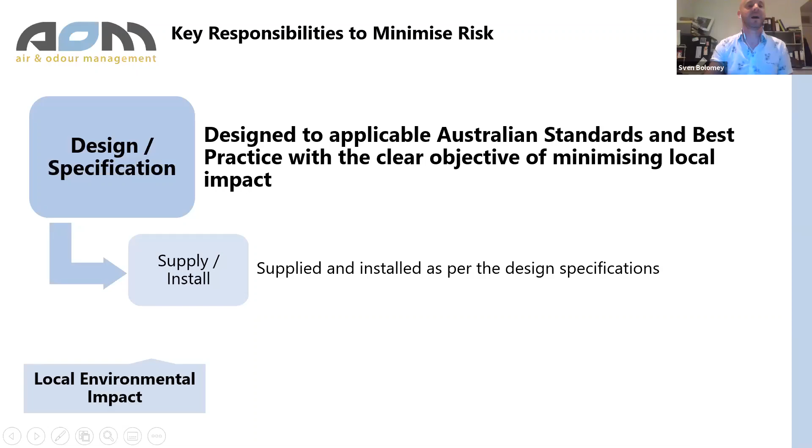So it really comes down to design. It's just so much more difficult to retrofit filtration equipment once a person has complained and the council has decided that complaint is legitimate. It is very difficult to retrofit equipment to meet the council requirements after the fact.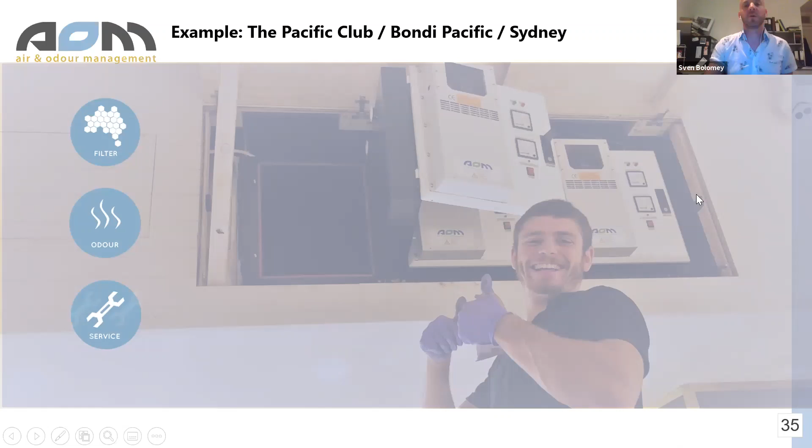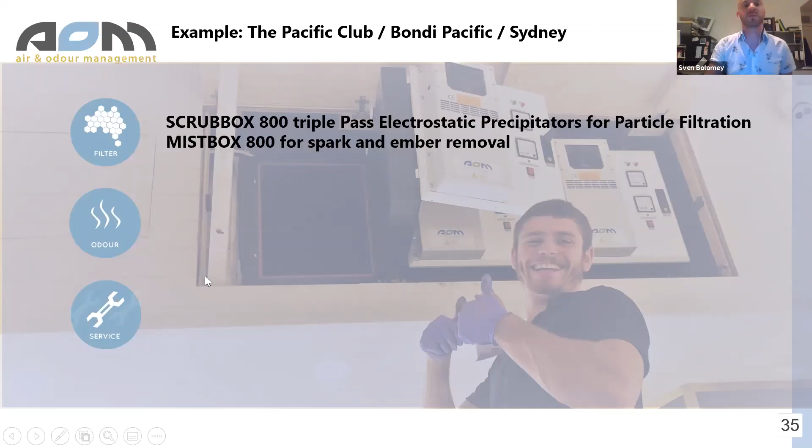Back to the Pacific Club, just to show you what we were able to achieve. What we've called a triple pass electrostatic filter, so not just one filter but three, going one after each other. These are electrostatic 1, 2, 3, because of the high level of concentration of particles. When filter 1 starts, it can achieve 95%, but then it starts getting dirty, so filter 2 takes over, and ultimately filter 3 also acts as a backup and does a bit of the work until servicing is done. There's also a misting system in here just to stop any potential sparks or embers getting through, plus some ozone to remove the odor, and this is serviced quite regularly as well.

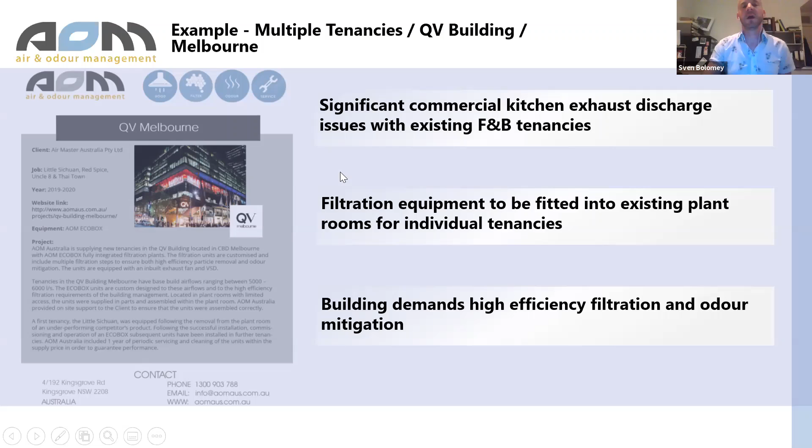Another example is the QV building in Melbourne. This is a perfect example where the building was built without filtration systems, but with sensitive discharges around loading docks, car parks, and so on. So we had to retrofit filtration systems into the building for each individual tenancy, supplied as plant room filtration systems. Ultimately, because there were so many issues, these were very much over-engineered, just because the building wanted to make sure there were absolutely no issues moving forward. We fitted these units, called ECOBOX, all-in-one, but supplied individually because they had to be built within plant rooms with limited access, since the building was already built, and we had to fit all these units through doors. These come with exhaust fans and so on.

Moving on, indoor air quality and health impact. I think I'm taking more time than I promised I would, sorry, but I'll try and get through the rest quite quickly.

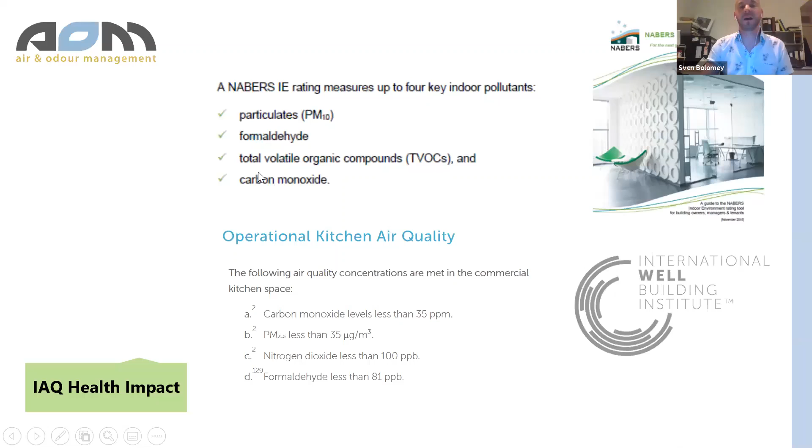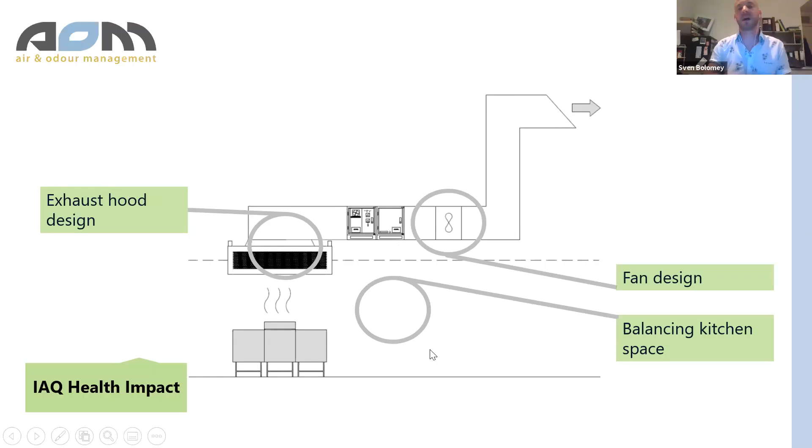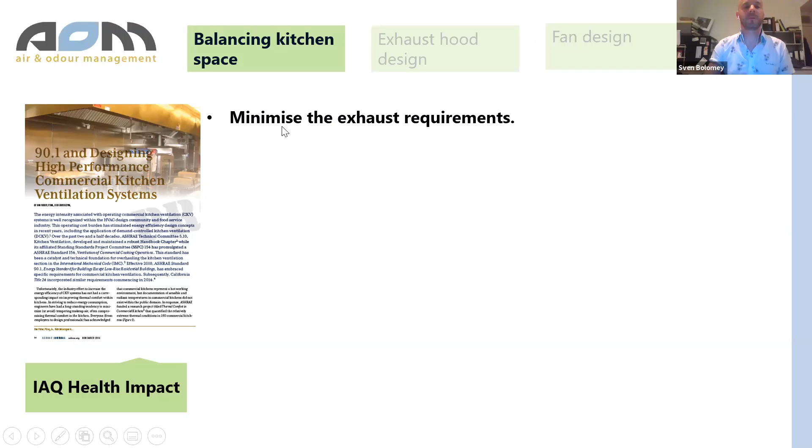So one of the key recommendations of this document is minimize the exhaust requirements. Less air you have to take out, less air you have to put back in, and ultimately, how do you do that?

With regards to balancing the space, this is very much a standard practice now. 80% of the exhaust air is to be replaced in the kitchen space. Generally what we recommend is that that's done in or close to the exhaust hood at 60%. Remaining might be air conditioning of the space at 20%, and then a balance of 20% as transfer air, so movement of air from outside the kitchen into it.

And any type of makeup air solution, particularly close to the exhaust hood, needs to be a displacement ventilation system at low velocity, as opposed to mixing ventilation.

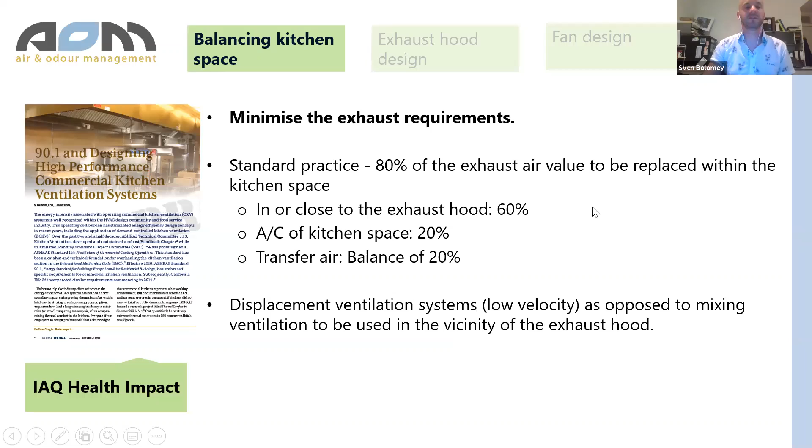So how to minimize exhaust rates? Australian standard AS 1668.2 gives us this option, section 3.6, which is the use of proprietary exhaust hoods as opposed to just standard exhaust hoods. Proprietary exhaust hoods need to be designed to a proven and tested standard, so you should get a certificate that says here's the standards it's been designed to.

Ultimately, their airflows are generally, in most cases, lower than a standard calculation because they refer to other international standards, and the particular focus is German guideline VDI 2052, which has in the meantime become the European standard and is applied throughout Europe.

That's a standard that looks at each individual cooking appliance and applies an airflow to that appliance based on two things. The first is the amount of heat produced by that appliance, the amount of heat you need to suck out, and two, the amount of condensation that appliance creates. Based on those two calculations, you take the bigger of the two, and that becomes your airflow allocated to the exhaust hood.

One of the main reasons why this produces less exhaust air than a standard calculation is because you're looking at each appliance individually. As soon as you have an empty bench space, which is quite often the case in exhaust systems, that's 0 liters per second of air. Then you might have a fryer and a char grill, and you allocate air to that.

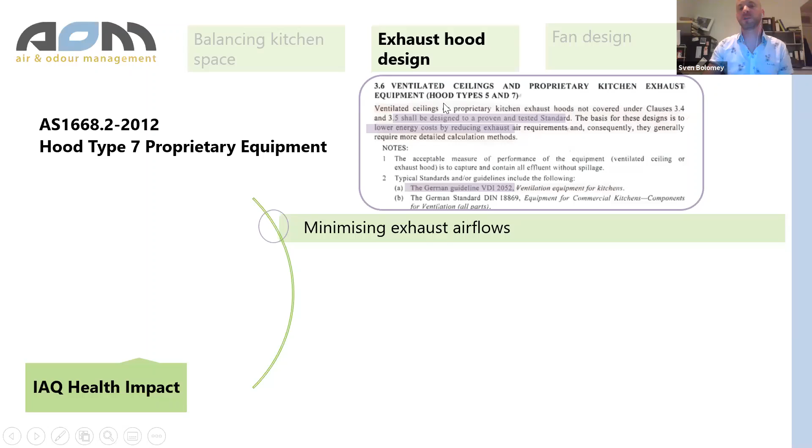So the advantage to these proprietary type hoods, which are the main brands you find on the market, is that they minimize the airflow. There are integrated makeup air systems, you get inbuilt filtration systems such as UV or electrostatic precipitators, and there's more flexibility in the design, particularly in smaller spaces.

Looking at the responsibilities to minimize risks, in this case to supply, install, and particularly the capacity to ensure a balanced work environment, you can have in theory all the airflows lining up and so on. It comes down to whether or not that has been balanced correctly, and that's done at the commissioning of the system, which is the key requirement there.

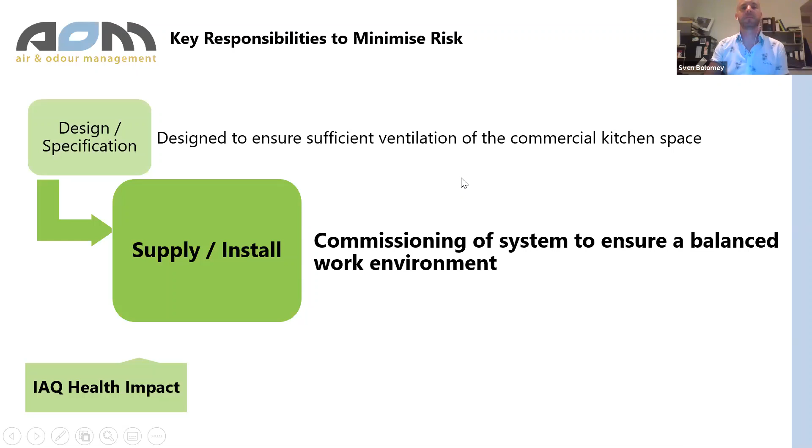Finally, just a couple of slides on urban environmental impact, very brief. It's just to say that general research shows that kitchen exhaust systems do produce high particle matter concentrations that are significant within a general urban air quality review.

So two studies that were done in the States, these are the key statements from these research projects, just to underline that they do have an impact.

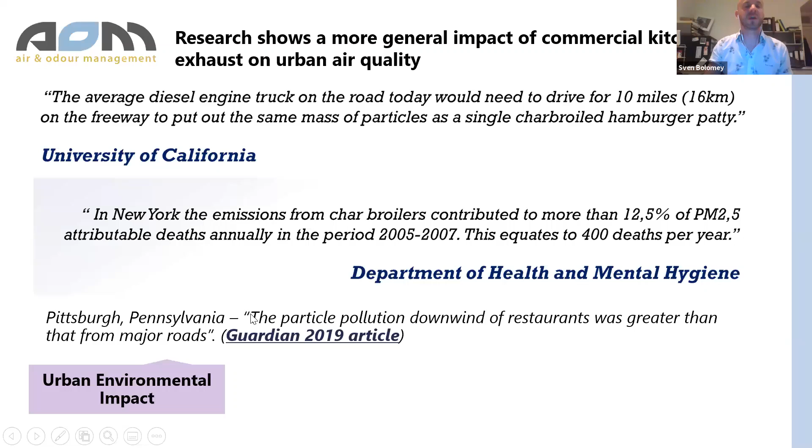More recently, I just saw this the other day, there's a Guardian 2019 article which also summarizes a lot of research done internationally. Here's one of the statements out of Pittsburgh: they had a car driving around and found that particle pollution downwind of restaurants was greater than from major roads. So there are a lot more particles coming out of a concentration of restaurants than there is on a major road.

So there's really nothing much from an engineering perspective that can be done, particularly with this more general urban air quality issue. It's going to be difficult to tell a restaurateur you need to put $50,000 worth of filtration equipment so that you minimize your footprint on the urban air, particularly with how standards are today. So it really comes down to whether or not a project developer is willing to invest that type of money.

What we find is, and I'll just run through these three different scenarios with their project development.

The first is a do-nothing approach, where there's no reason to go fit expensive filtration that then has to be maintained.

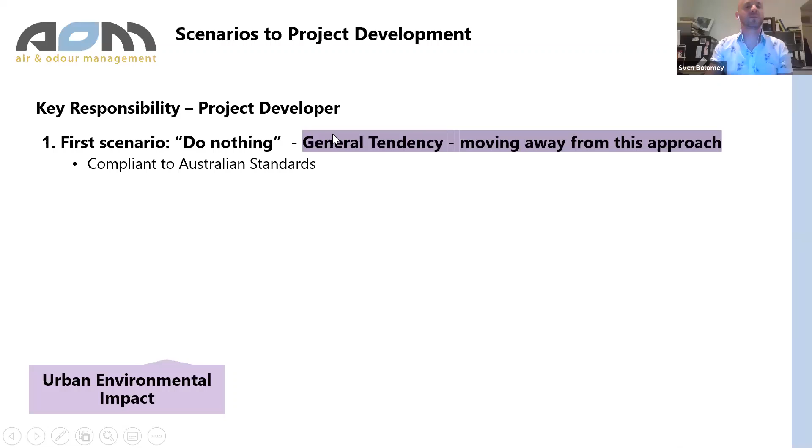But what we do find as a general overall approach, moving into a second type of scenario, is more voluntary treatment. That voluntary treatment often relates to filtering particle matter, getting rid of visible smoke, or filtering grease as close as possible to the hood to stop grease buildup in ducting. That's something we find more and more often.

One case is the fire pit video - that's in a hotel, and the hotel didn't want their guests looking at a plume of black smoke coming up from a podium level where all the hotel rooms were overlooking. So they decided to put some form of particle filtration to get rid of that visible impact.

Another example is a restaurant in a heritage building, with the insurance company telling them they need to minimize buildup of grease and the fire risk of their system, because otherwise they won't be able to insure the exhaust system or the restaurant in this heritage building.

And the third scenario, one that we've discussed through this presentation, is compulsory treatment. Because you have to apply Australian standards to air discharges, you need to filter out the particles and then mitigate the odour.

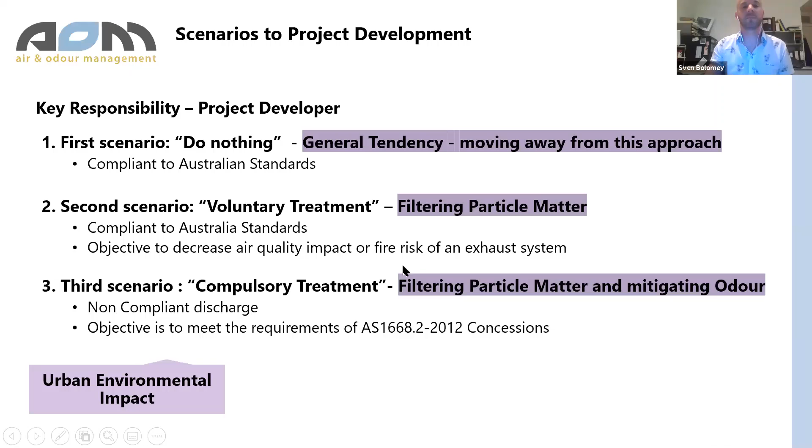In those cases, you need to prove that you're achieving that, and ultimately come up with a performance certificate from the solution you've proposed, detailing all the independent testing and so on that comes with the equipment proposed.